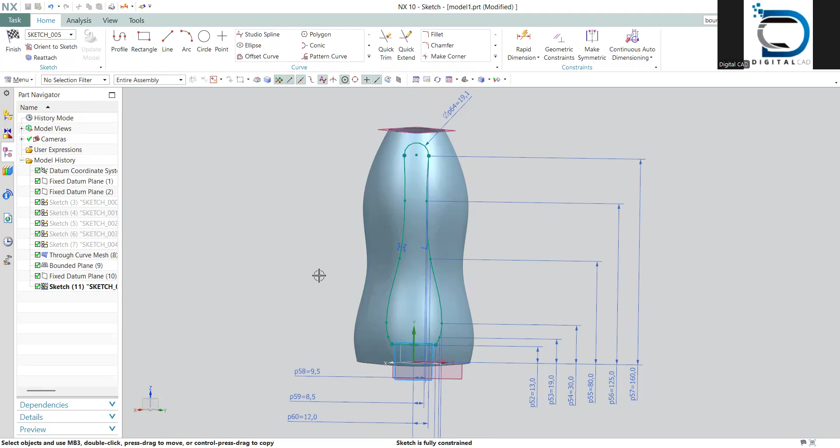Okay, in the previous session we stopped with this sketch in part 1. So we start with part 2 of this sketch. We completed this sketch and it is now fully constrained. So now I exit the sketch.

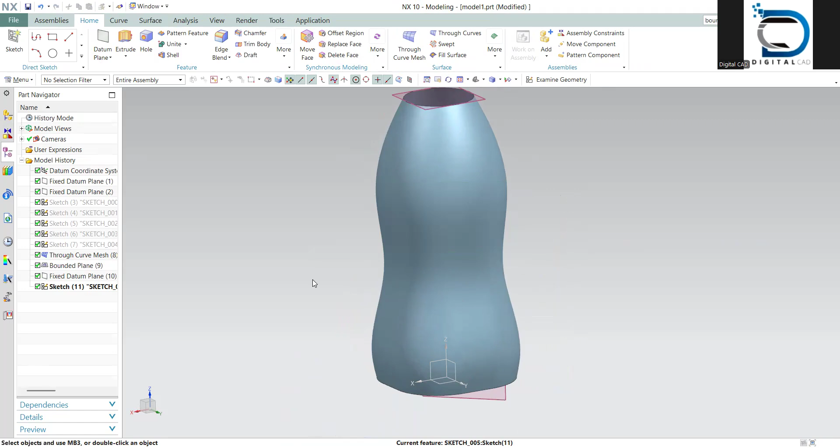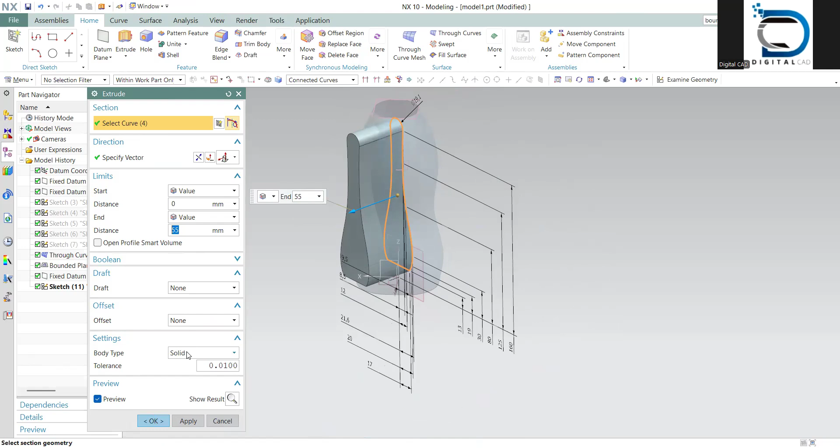Once the sketch is exited, I will try to extrude this surface normal to the sketch plane. I'll say extrude, pick this, and let it come out. Now we are in surfacing, so make sure it's completely out of your water bottle. I don't need a solid one, I'll make it as a sheet. I'll just say okay here.

So now you can see my sheet is generated. Once this is done, I will offset this outer profile of the water bottle by 3mm inside it. So that will define the depth of the depression.

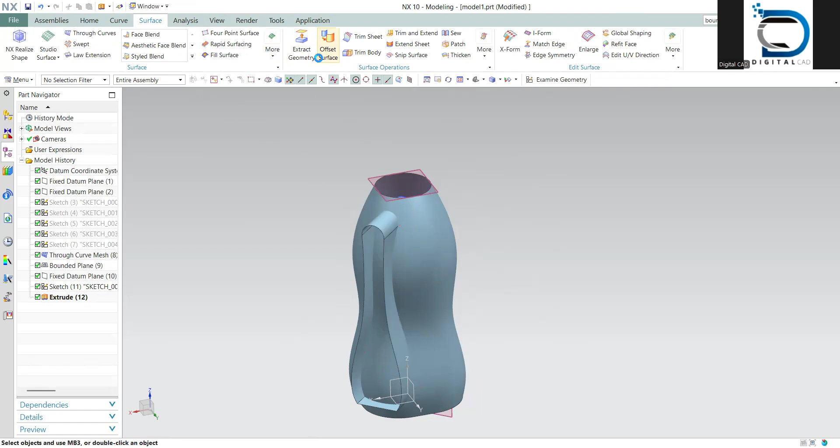So I use offset surface, offset surface, set it inside, reverse the direction by 3mm. Here you can see the offsetted surface is here.

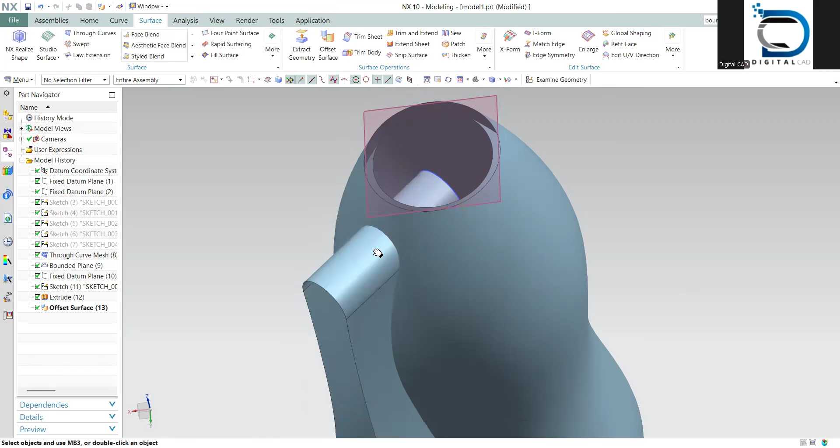Once this offset is done, what I would do is the trim sheet. I will trim this offsetted sheet using the extrude that we have done. So I will hide the outer face of the bottle. I'm using this offsetted surface and I will trim it off.

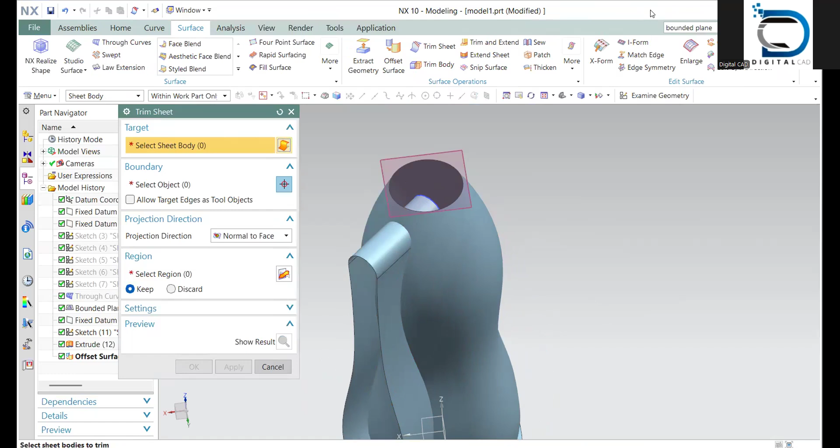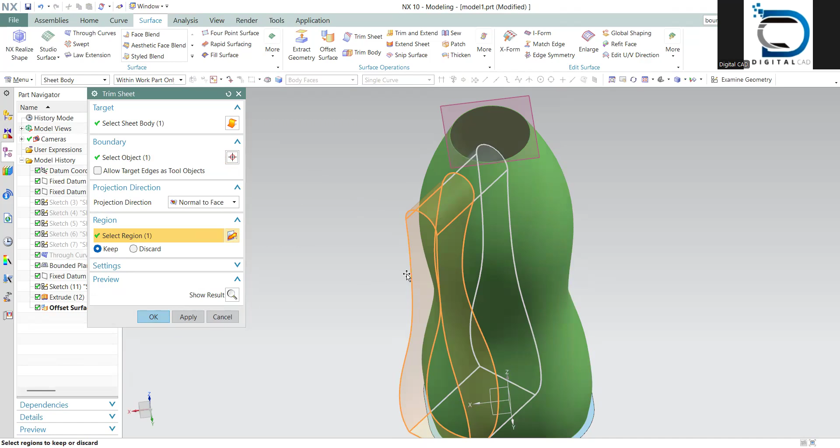This trim sheet. So you can see, I think we are making a mistake. We need to trim this sheet. So I use trim sheet, pick this one and pick this body, and I just say I want only this portion of it. Just say okay, let's see the result.

No, we want the other way around. So I do a Control Z and I say trim sheet, pick this one and this one. I don't want this portion. I say discard and I just say okay. So now you see the middle portion of the trim sheet is now ready.

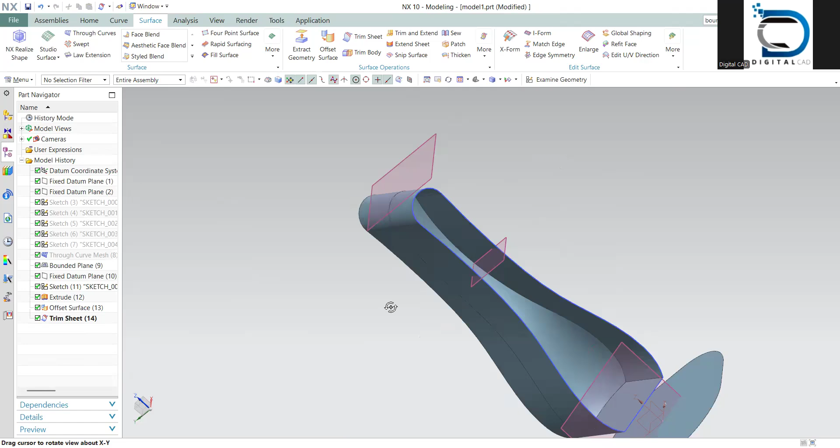Once this trim sheet is done, now I will take the outer profile of the water bottle and then trim this outer profile using this body.

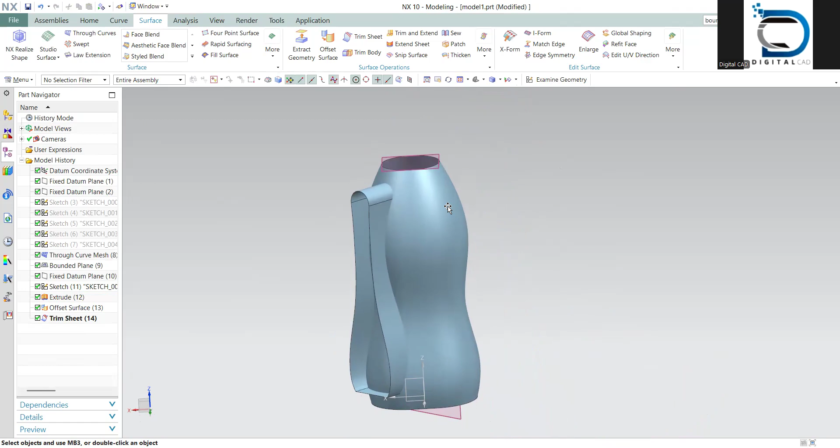So I take this trim sheet, and okay, I don't know, my Ctrl+Z happened. I have to do the trim sheet again.

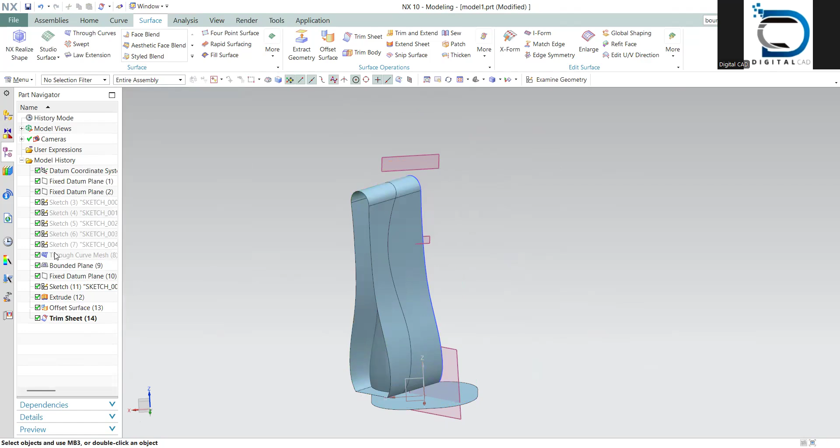Okay, I have this portion. I take this back and then I use this trim sheet, trim this one with respect to this one, and just say I want to discard this portion of the water bottle. Just say okay.

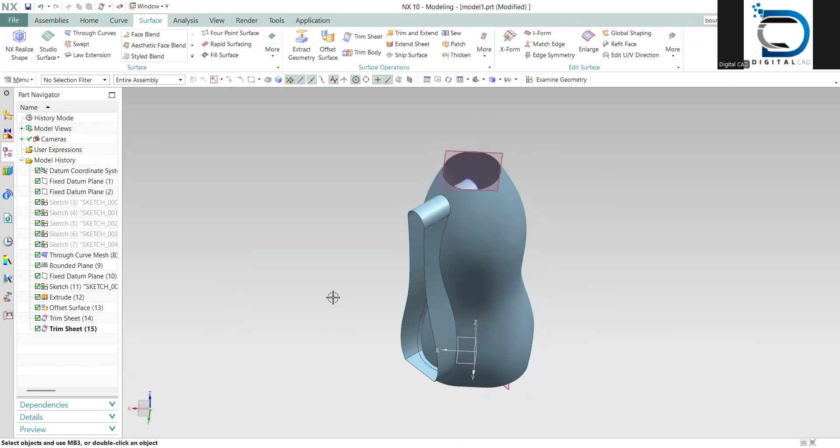Okay, I think I made a mistake. I don't want this portion. Change it. This one. I don't want this, I will discard this portion. Just say okay. So now you see the depression is inside.

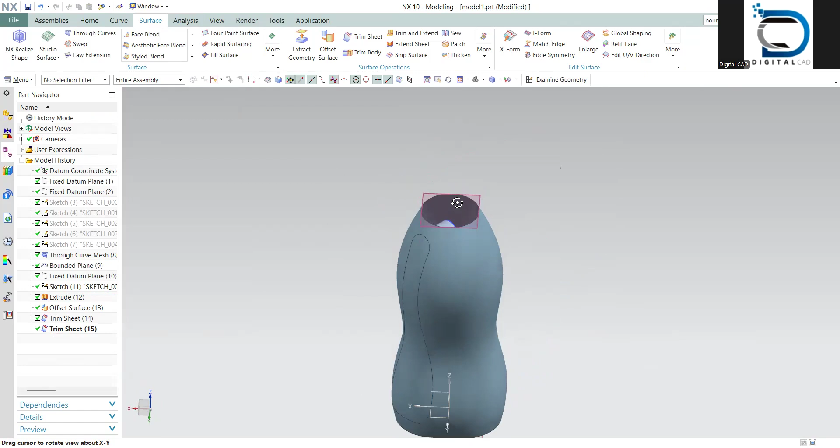So this portion only I needed it. Okay, this is done now. Once this is done, I will trim this sheet using this boundary, so I don't want all these extra portions, right? Again, I will trim it.

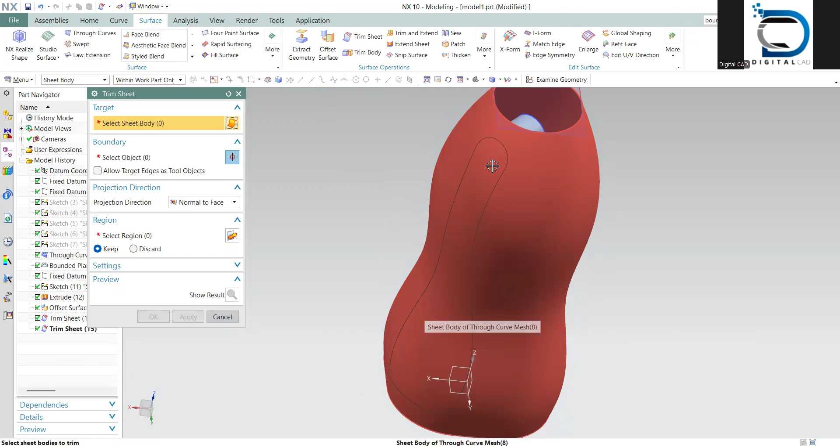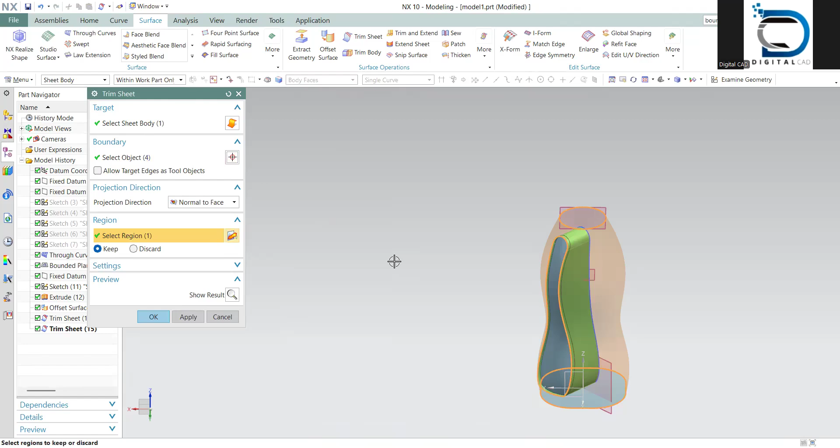So now I'll trim, I have to take a depression here. So I will take the trim sheet, pick this as a sheet body, and pick this body, and just say like this. So I want something like this. So my depression is now created on the water bottle.

Once this is done, I have to trim off the unwanted portion on the inner side of the water bottle. So you see this is an unwanted portion, so that I will trim it off using this boundary.

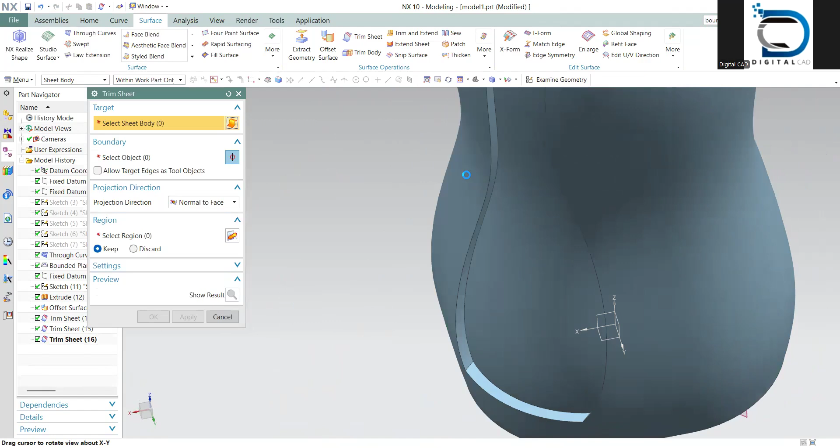Okay, I think I have to pick the other surface, pick this one, and then use this as my boundary. I don't want this portion, I say discard, I just say okay. So now you see it is discarded completely. Only the depression is staying.

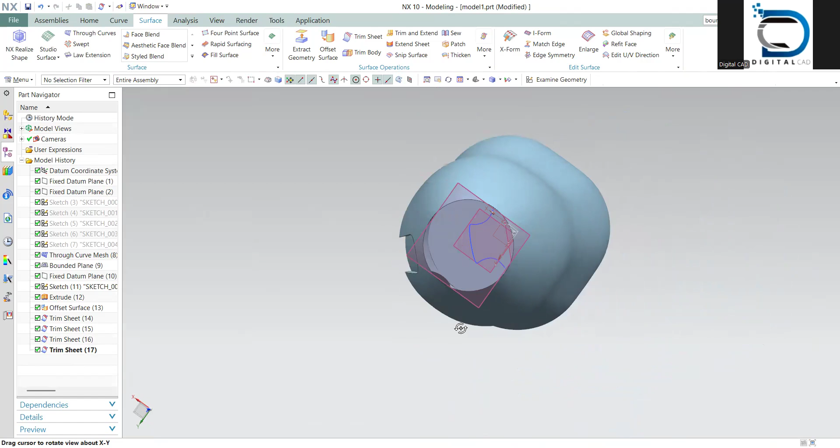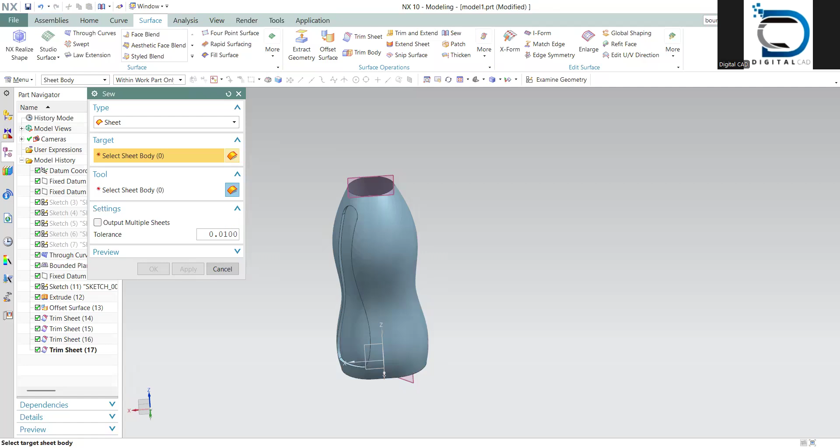So now this portion is done. Now I want to do a pattern here all around the bottle. So before that, I will sew the surface, join these surfaces together. To join, I have to take the sew command, pick the sew, and then pick this and this surface. I'm sewing them together. Once this is done, it's okay to do the pattern geometry.

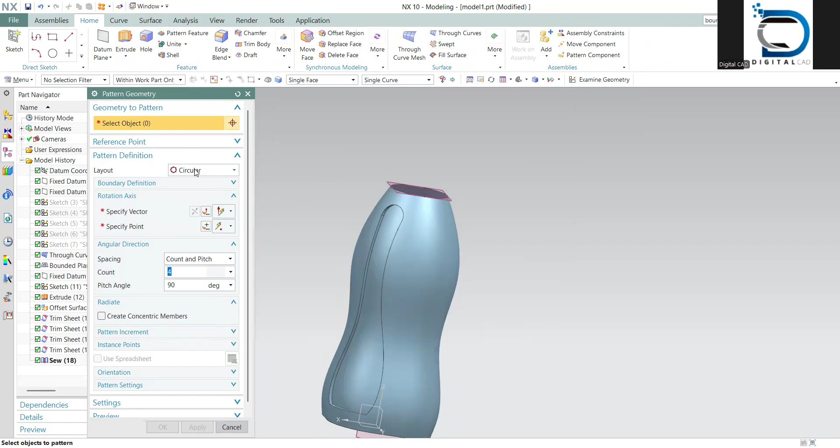So I'll go to home, go here, find pattern geometry. Here I take circular and I use the object that is the sew surface, and then the vector to be the z-axis. The center point can be this one.

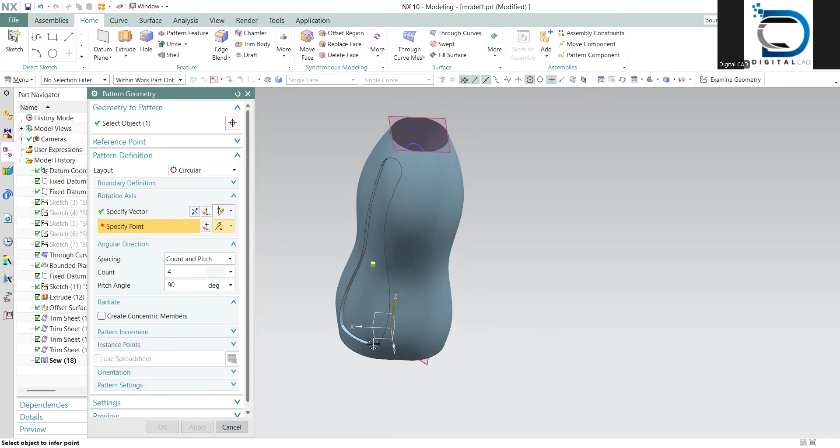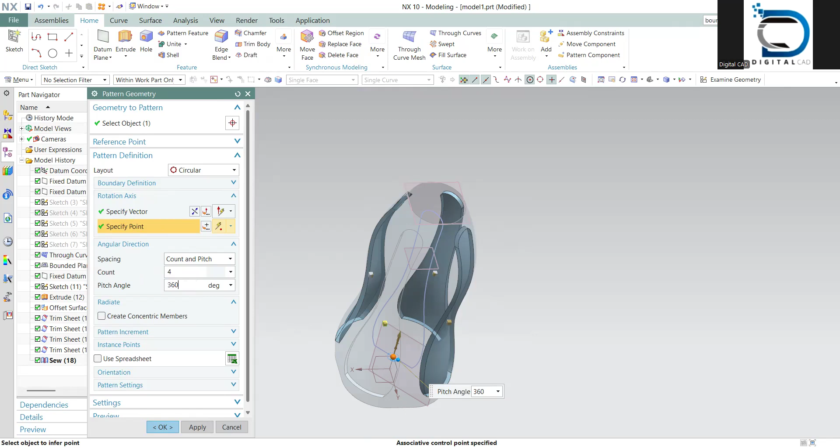Just trying to pick the center point, using the center of the bottom face. So here with pitch and count, what I'm doing is I want 4, and for the pitch angle you can do 360 degrees divided by 4, something like this, so you have all 4 faces like this.

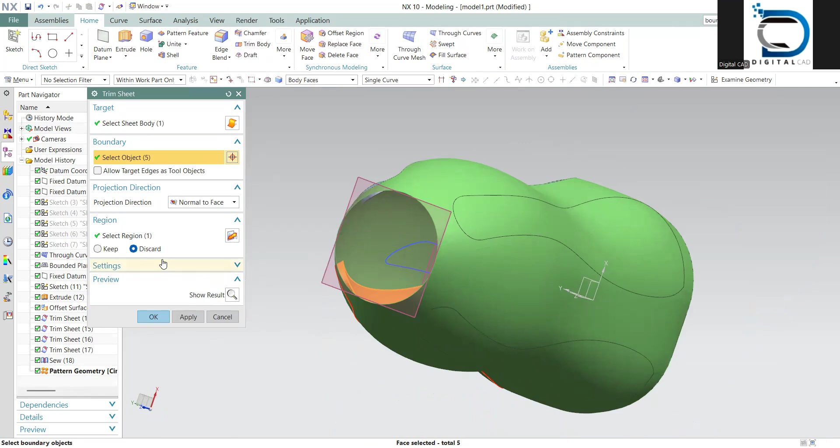So now you see everything is created. Now you need to trim this sheet using this, so I use trim sheet. I want to discard this portion, and then I think you can pick all the other surfaces as well.

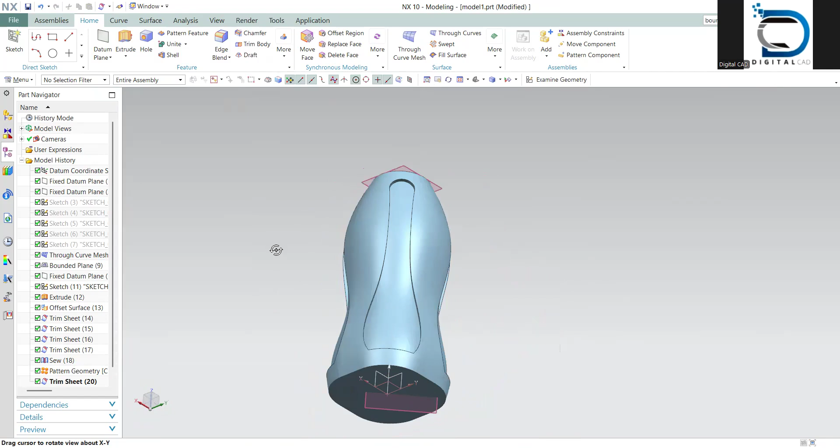Now it should be okay. So now you see the outer profile, we have received it. Okay, we have done the pattern as well. So once this pattern is done, now we'll go to the base of the water bottle.

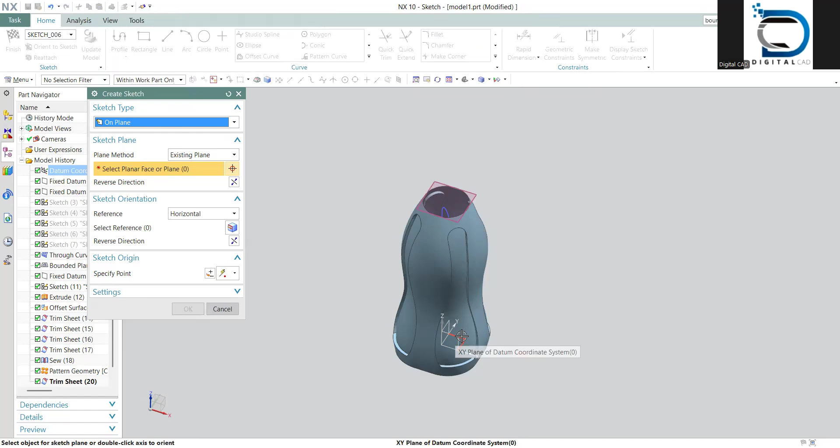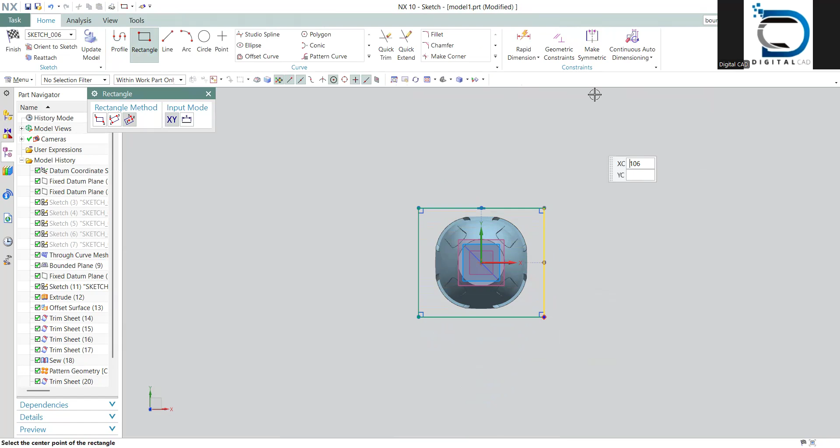So for that we need to draw a sketch in the XY plane. I create a new sketch with XY plane and just say okay. Then I remove auto dimension and I will draw a square of 55 by 55. I use this rectangle method, center, using this as a center, pick like this, then I dimension it by 55 by 55.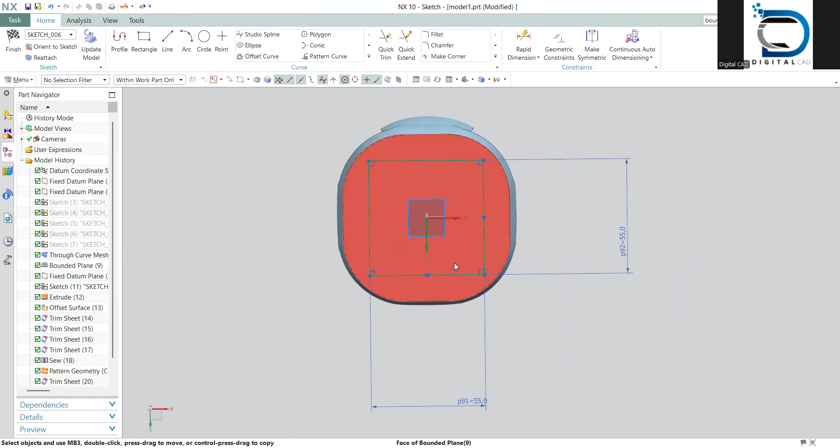It should be within this boundary, so that's why I have used 55 by 55. Once this is done, maybe we can add filleting to it. I will add a fillet of 10 all around, something like this, and then I finish the sketch.

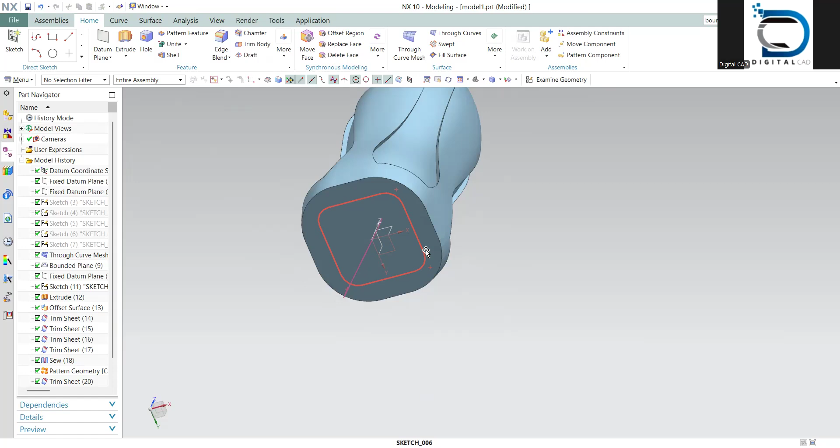Okay, so my bottom base sketch is now ready, and on that sketch I'll try to do an extrude. I don't want first let's define how much depth we want there, so I will define that height to be 12. Okay, I don't want a solid feature.

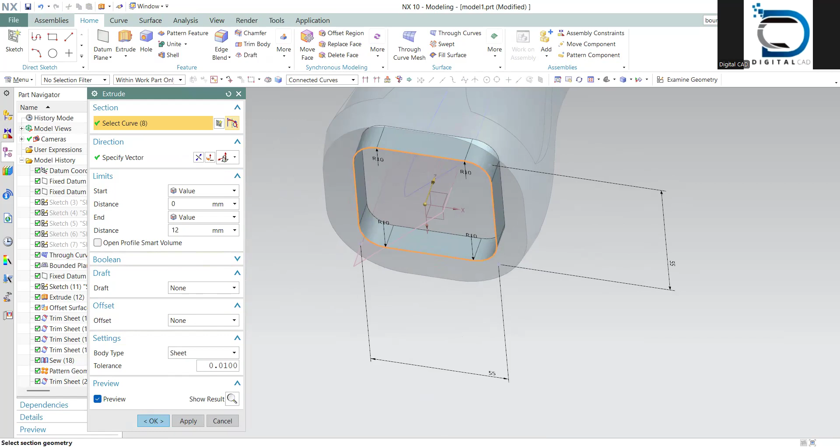I'll make it as a sheet, and then I want to have a draft as well. So I say for the draft from the start, let's say 30 degrees, something like this. It should be okay, and I just say okay. So now the sheet is generated already.

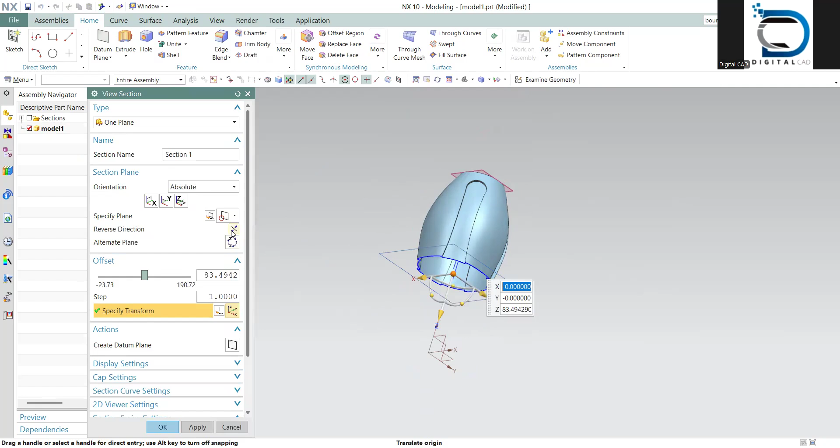So you can confirm it by taking a section here. I'll take a new section, flip it and move it down. So by this you can see our section. The one that we extruded is this surface. Maybe I can change the color of it so that it's easily visible. You can see here, this is the new surface that we have generated.

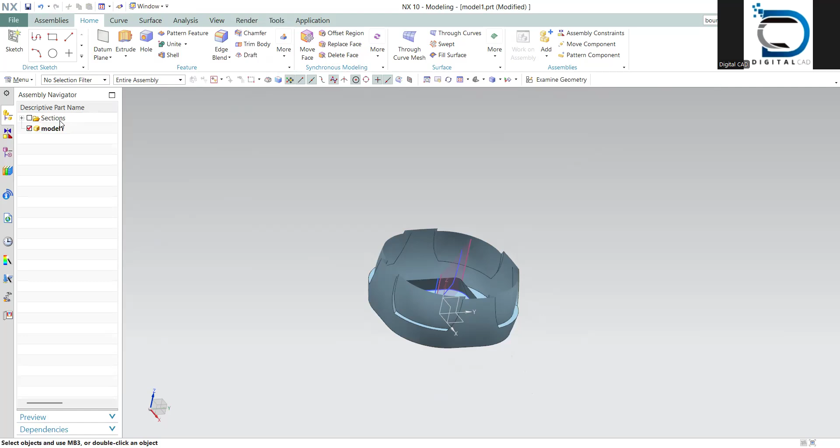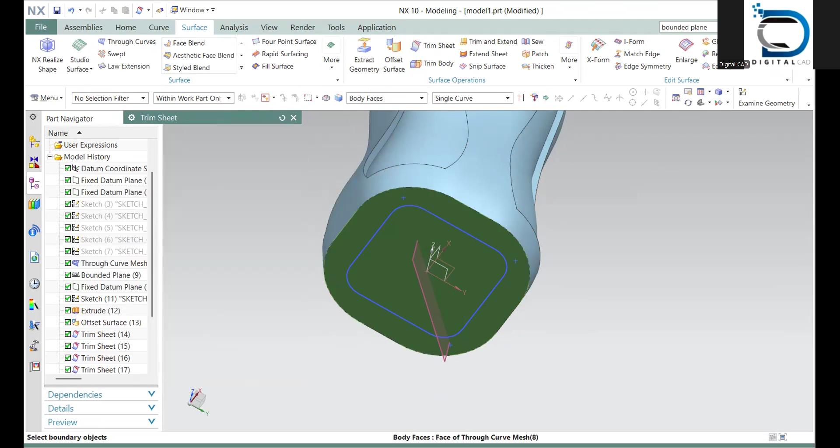So I will trim this. I'll come out of this section, unclip it, and then I will have to trim it off. I use trim sheet, from this, using the new extrude that we have done. Okay, and now you can see this is how it will look like.

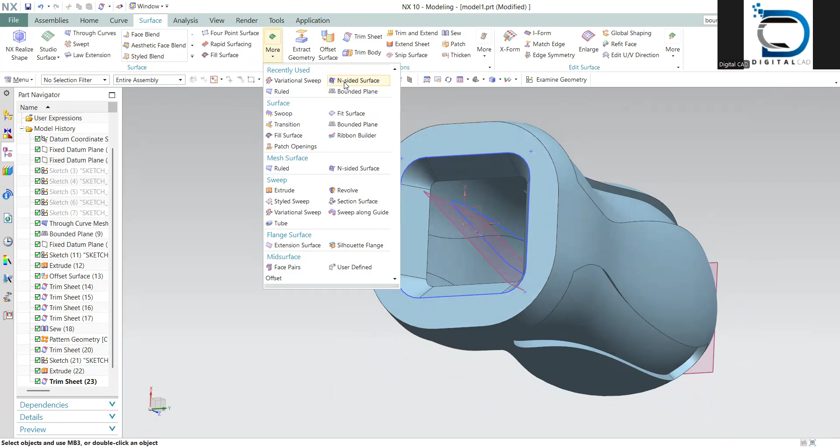So we want to keep that, just say okay. So you see this sheet is now generated, and there is a slot here, so we need to fill that. Since it is planar, you can use bounded plane, just fill that surface. So like this you can close the surface for the bottom of the bottle. So now the bottom of the bottle is done.

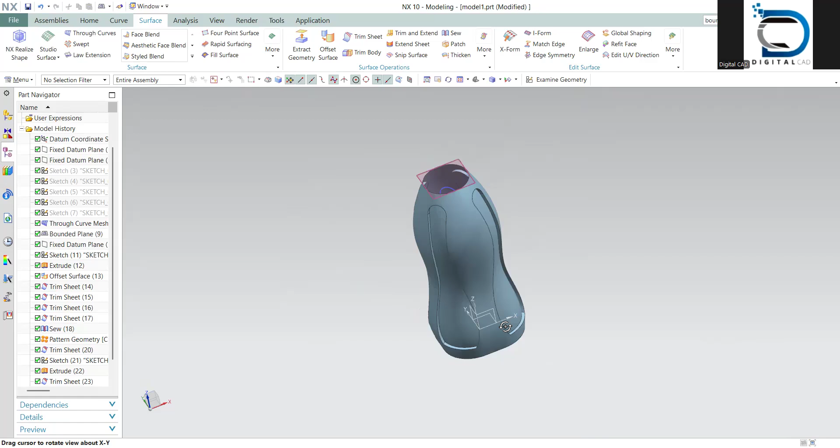So now let's go to the lip portion of it. For that, let's go and draw on the YZ plane or any vertical plane for that matter. I'll create a new sketch using this particular plane and I just say okay. I remove auto dimension. So now we are going to draw the lip portion of it.

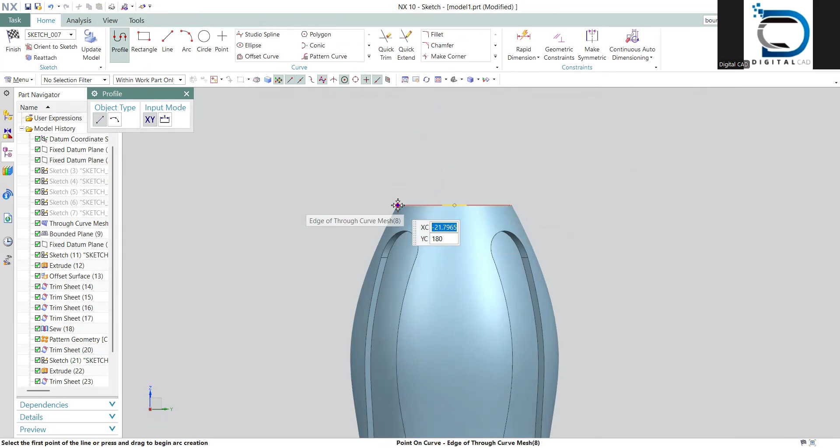So for that, what I do, I take a profile, use this edge, I draw a particular vertical line with a length of let's say 3 mm. An angle I'll make it as 90.

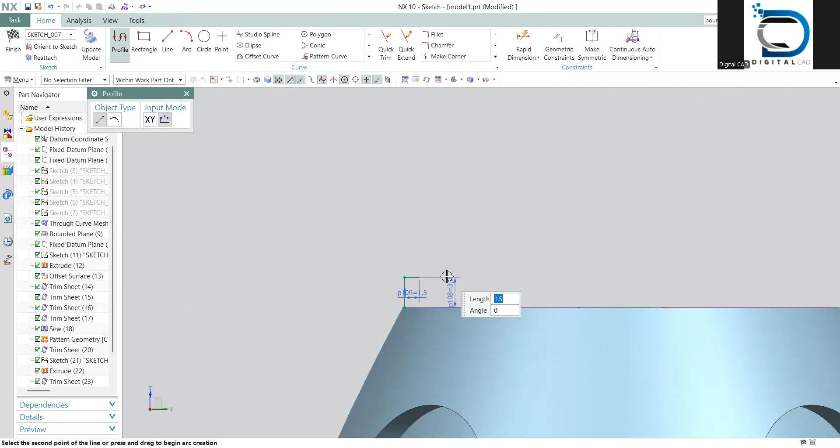After this, I will draw a horizontal line of 1.5 mm length with an angle of 0. Then I draw again a vertical line with a length of 1.5 mm, an angle of 90. This vertical portion is now done. Then again I will draw a horizontal line with 1 mm length and 0 degrees.

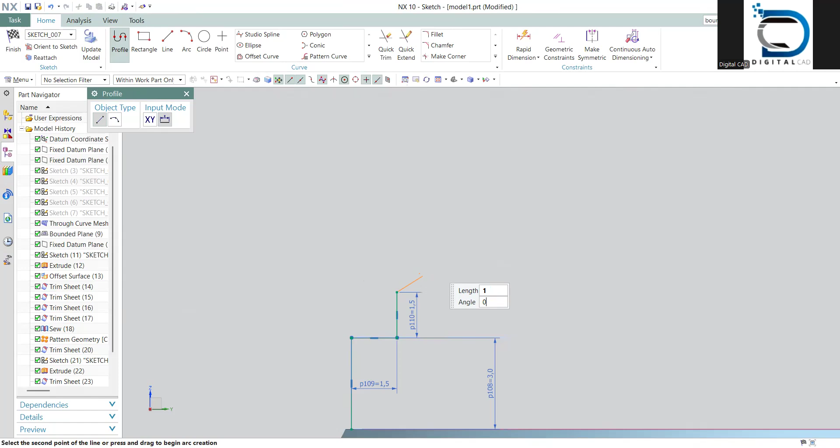This is done. Then I will draw a vertical line directly, something like this. Length we will define it later. So I pick this length from start to this edge. Here you see there is an issue — it is not exactly on the circle. So I will fix that.

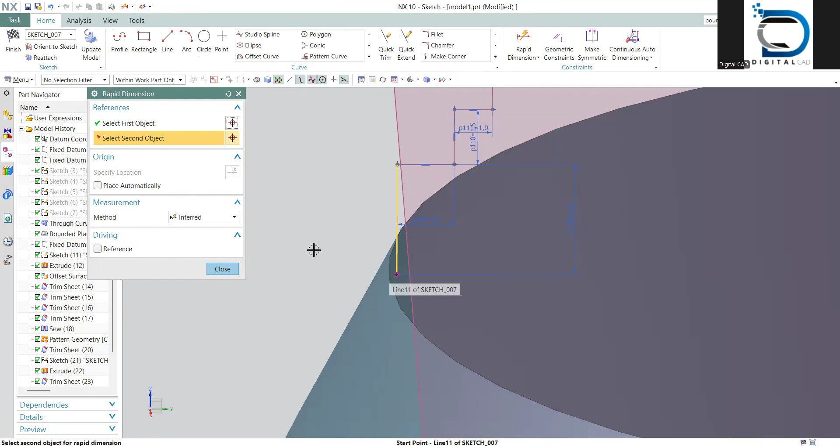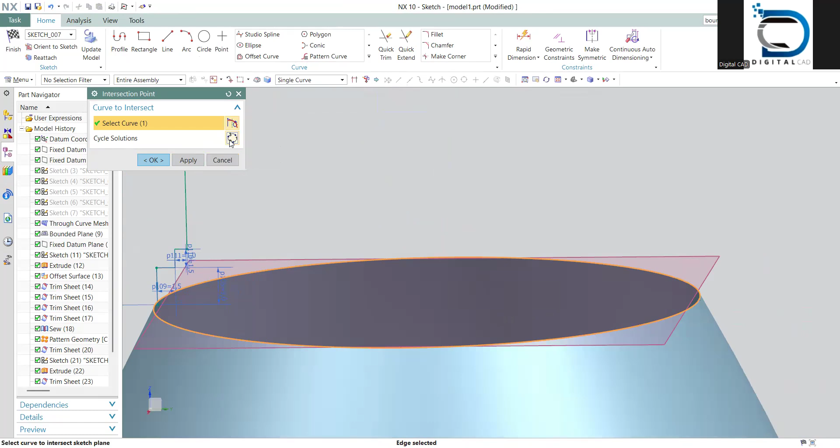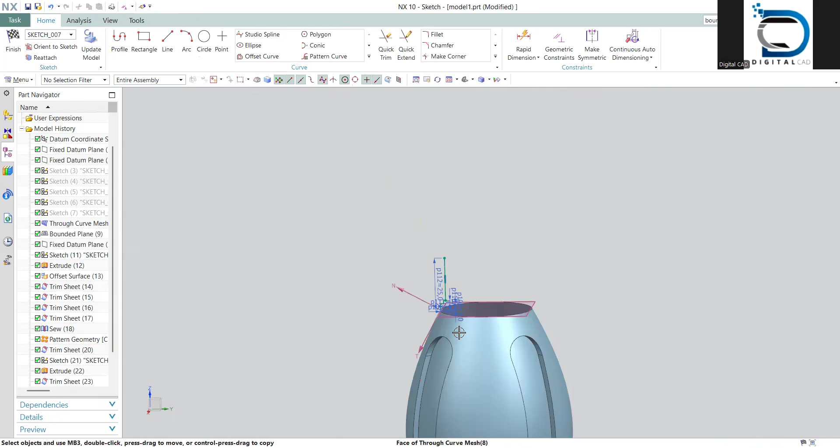Then I will define this length to be 25 mm. Then I will take an intersection point. Got an intersection point here. Then I'll try to constrain using coincident, this one and this newly created point. Now we see the sketch is fully constrained. So once this is done, now what I do is finish the sketch.

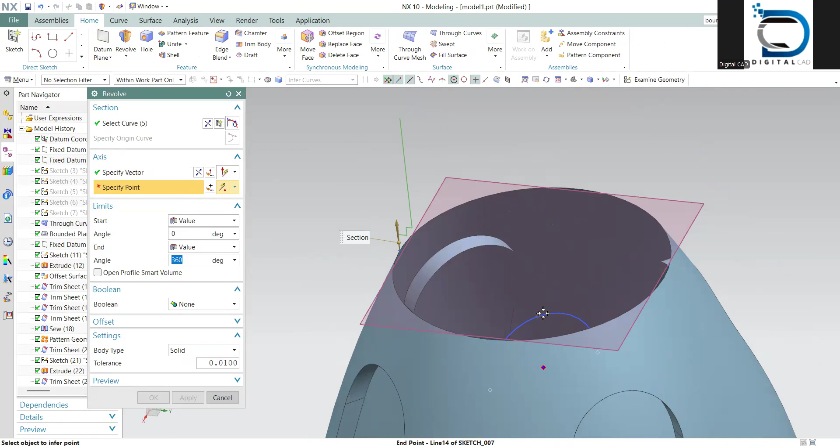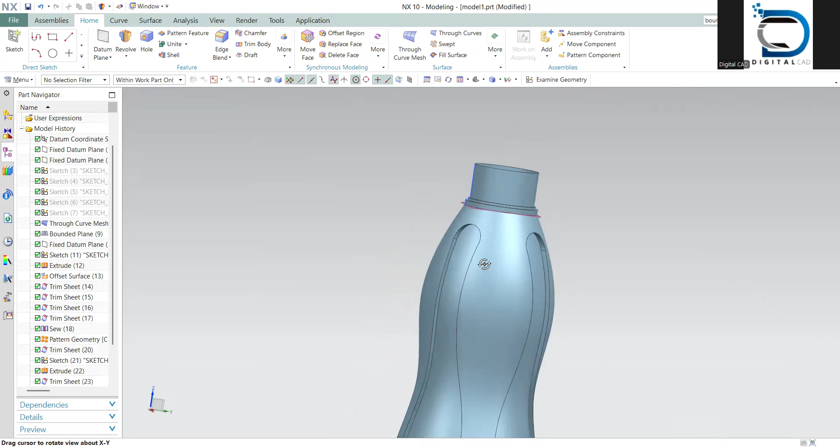Now we need to revolve. For that, go to Home, under Extrude you will find the Revolve option. Revolve using this one, and the center point is the center of the arc, something like this. Then you can say sheet only if you want it as a sheet, and just say okay. It's 360 degrees. Let's say okay. So now we have done the lip portion of the water bottle as well.

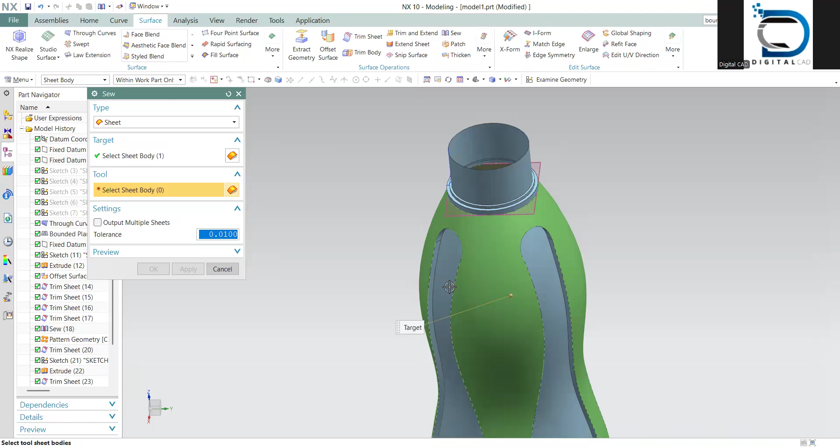After that, let's try to sew all the surfaces, because the bottom is in a different sheet, the middle portion is in a different sheet, and the lip is a different sheet. So I'll go to Surface and try to sew it. Base 1, 2, 3, 4 — this one, the base, and this one, and this one. Everything is now sewed together.

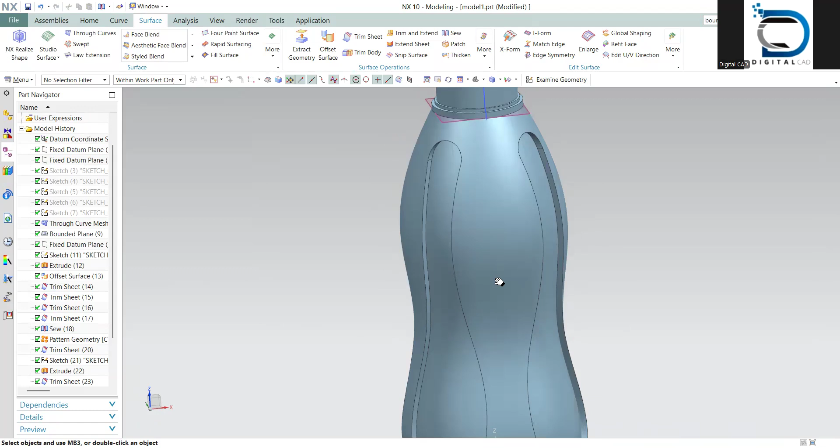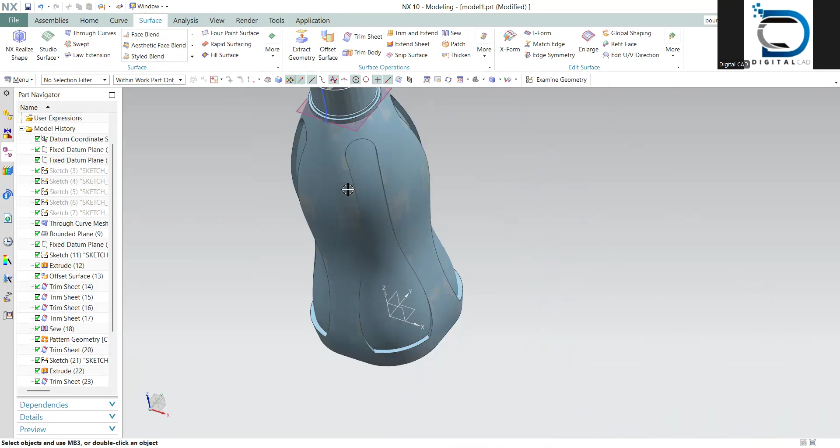So now my water bottle is almost ready. The only portion left is to apply thickness to this bottle. I will use the Thicken option, pick this entire body, and it should go outside, then should go inside instead, and then I set a thickness of 1 mm. Now my water bottle has a thickness of 1 mm as well.

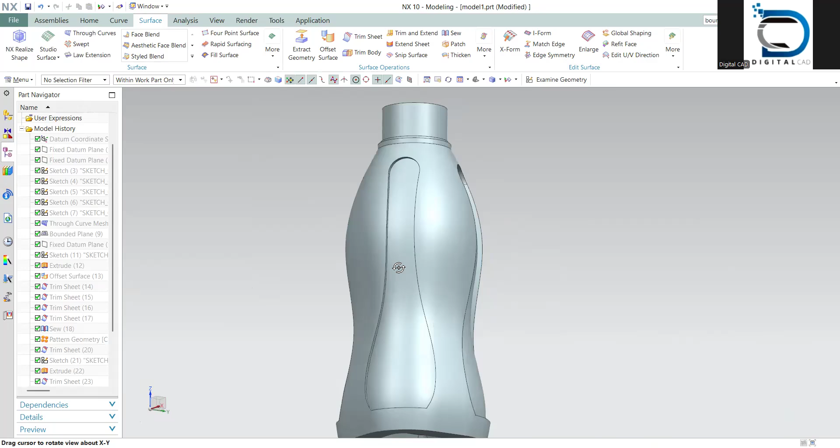Now I will use Control W to hide all the surfaces, sheet bodies, sketches, and datums. Everything is now hidden. Maybe I can hide the points as well. Now you see my water bottle is ready completely. The only portion left is to add some fillets, so let's do that.

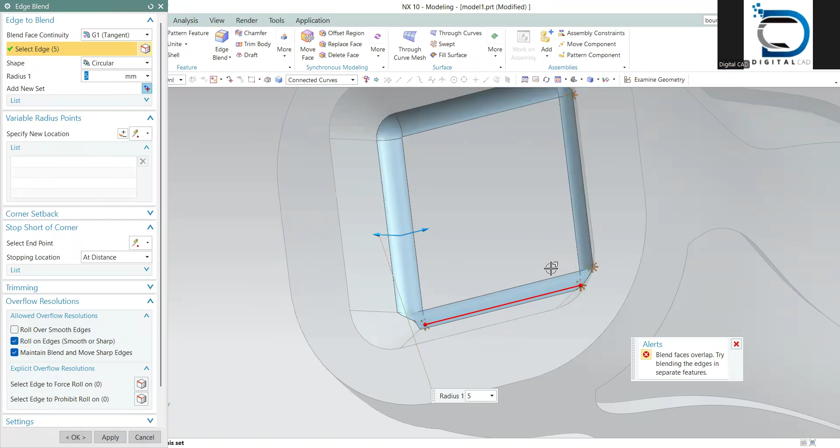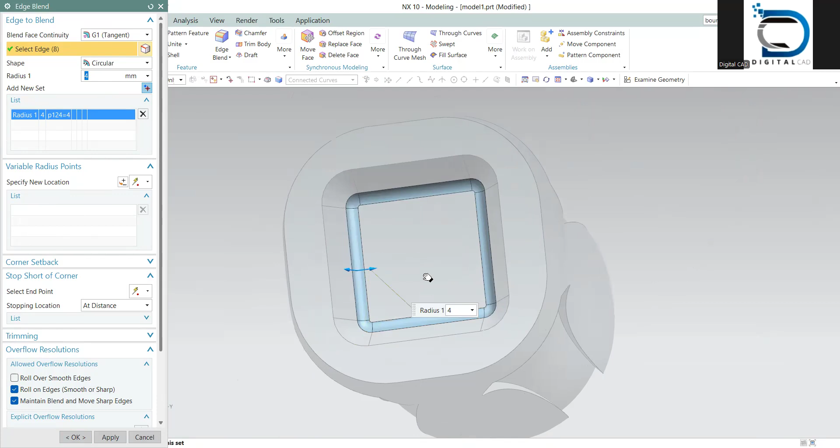So I use the Home option and do Edge Blend. Maybe I'll reduce this value — it's too big. Let's say 4 mm. This edge is not picked, that's why it's showing an error. Apply 4 here, and then I'll apply a 4 mm fillet here as well, and then on this outer boundary as well, like this.

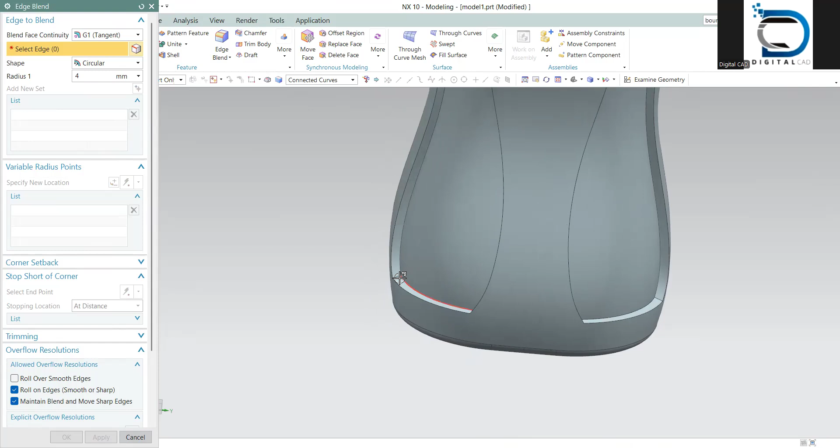The base is now ready. Next I go to this area and make a bigger fillet, let's say 5. I think I can still increase it, let's say 10, and all these edges all around the bottom. I picked the wrong edge.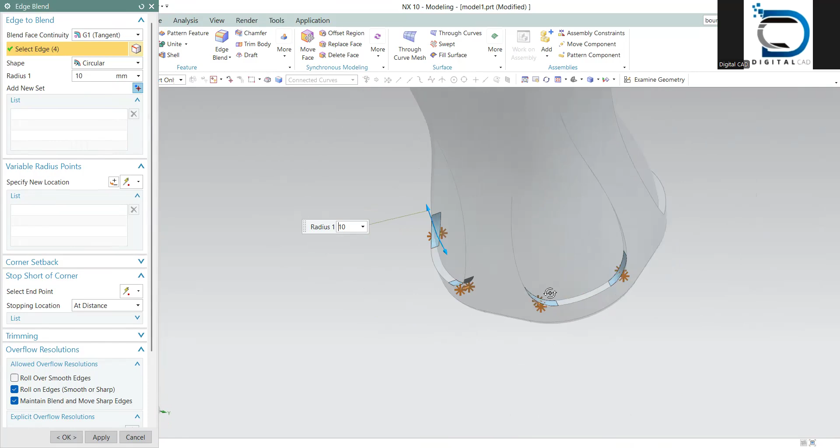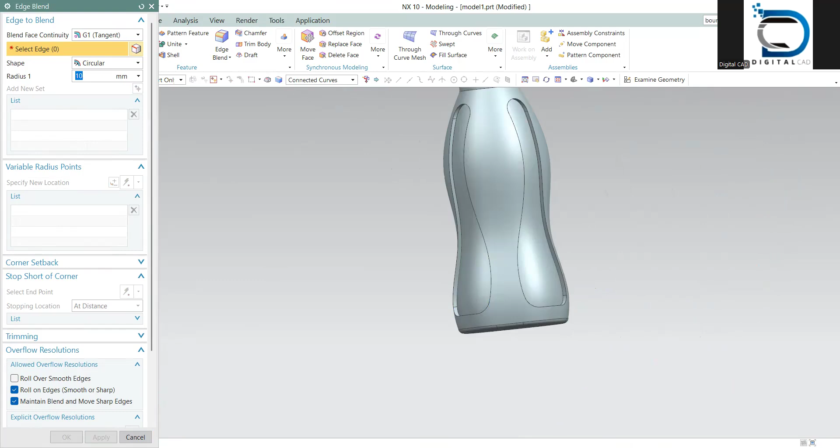I use the Shift button to deselect, and then I pick the right edge. Now all around is picked. I just say apply — the fillet is applied for these edges, and now for these vertical inside edges I'll apply 0.5. Not this one, the inner one.

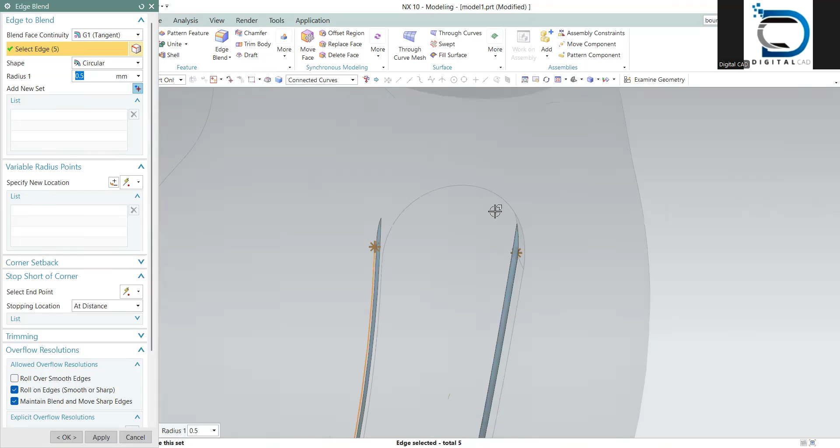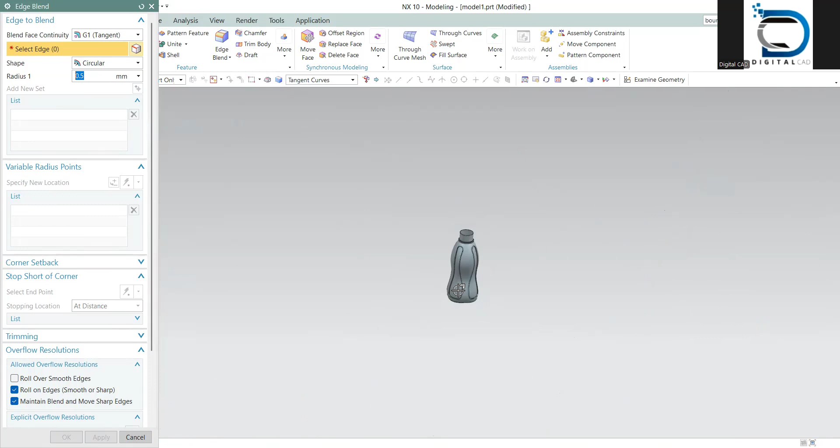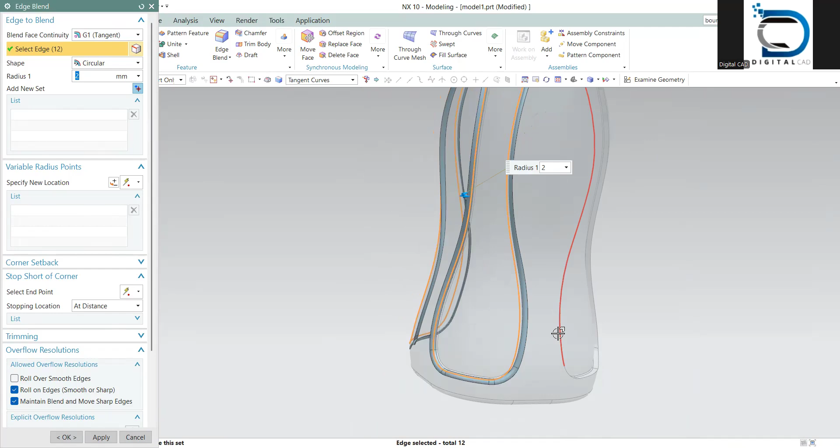I take tangent curves so that I don't pick one by one individually. The radius is now done. Next we'll apply the outer radius. I will pick this and try to increase it to 1, then up to 2 — it's okay. Let's say apply. Fillet is applied here.

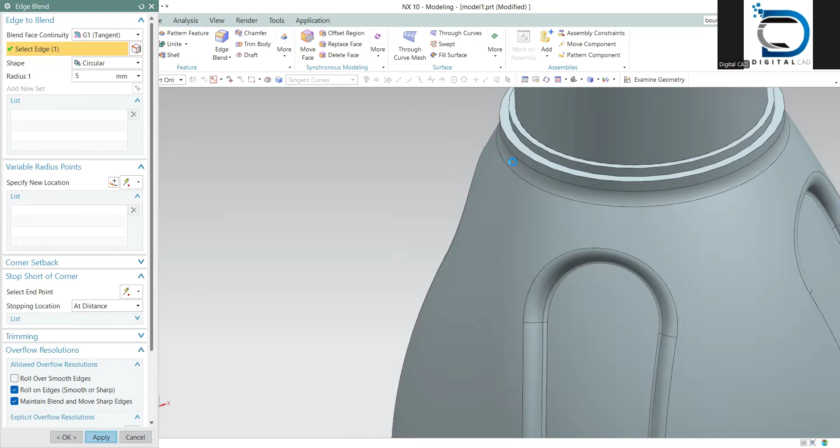Maybe the last portion is the lip portion of it. For the lip portion, I'll just apply a fillet to the bottom base — this one, I'll change it to 4 or 5, then apply it. And then for all the remaining edges, let's apply a very minimal fillet of 0.5. Okay, seems to be okay.

Finish it. So now you see your water bottle is completely ready with all the fillets applied.